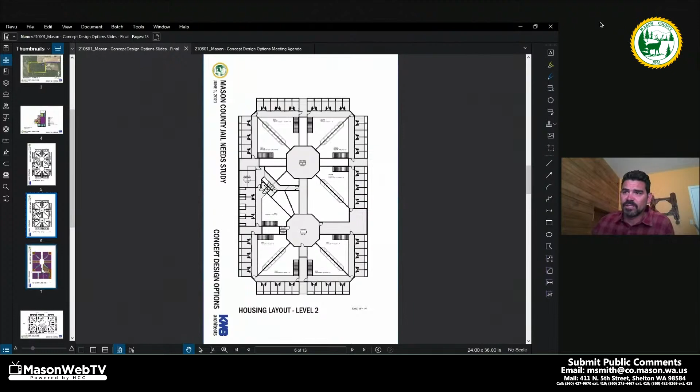And then this is another one we started analyzing: what if we only have one control booth, one central control, again with a radial plan. We'd locate a few additional day rooms around that central hub, and essentially split where those day rooms and units are connected.

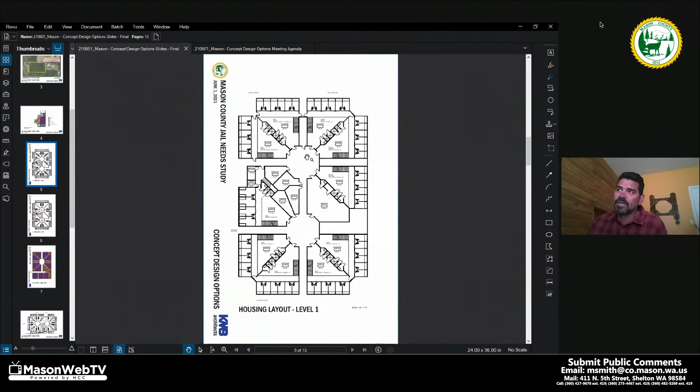So essentially we'd have access looping through more in a 90-degree pattern with this option, versus coming back to the other option where you'd have potential for access either straight through or from the side into this kind of central circulation area underneath central control.

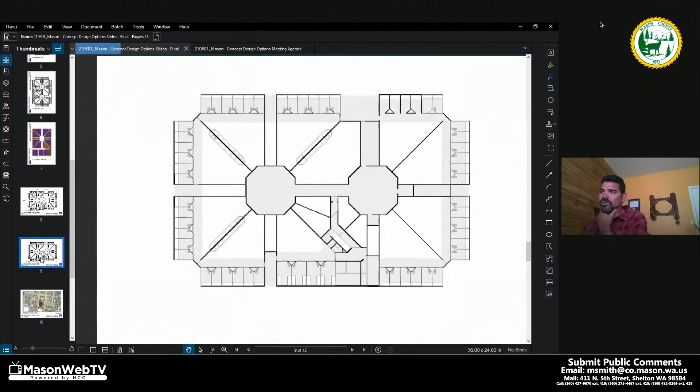And then these were just some other alternatives with regard to how those could possibly get laid out.

So first things first, Kevin. Was there an assumption or a preference with regard to having one singular central control room, or a preference to ultimately have multiple to be able to view directly into each one of the units?

For efficiency's sake, obviously if you have 2 control rooms, that's another FTE, well, another 4.6 FTEs to man it.

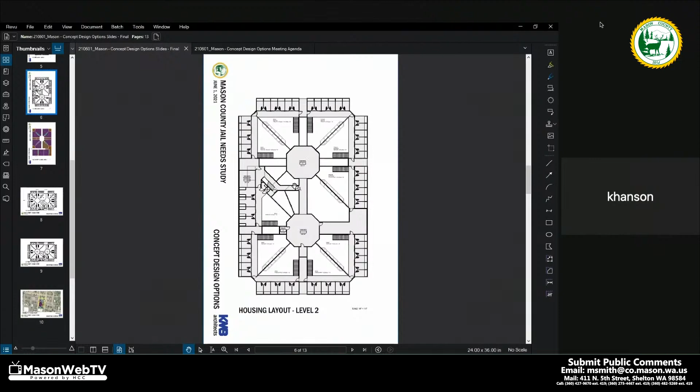And then the other thing was the difference between these two was access to the rec yards. On your first plan, you'd have to come out of the day room and into a corridor and then into the rec yard, which involves staff transport to get them in and out. On the second plan, it looks like we could have direct access to most of those yards from the day rooms, which would not involve staff having to escort inmates in and out. So I'm looking at staff resources, and the second one seems to make a lot more sense to me.

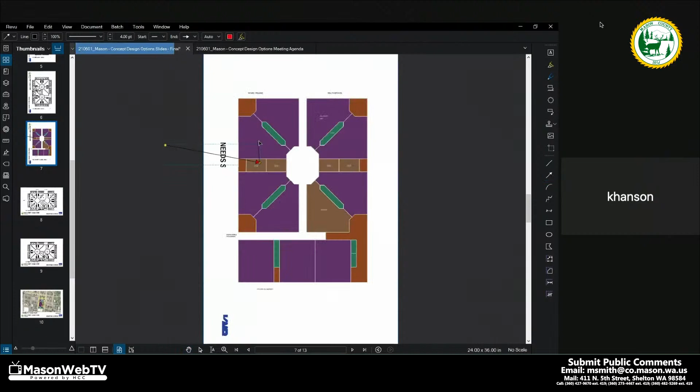Essentially, what we'd be able to do is kind of pick and choose. But essentially, especially if we end up saying your higher custodies are here and here, and depending on where we locate, then all your lesser custodies here and here would be going to your larger day room. So there will be transport, but your higher custodies would most likely have direct access to those smaller rec rooms and outdoor rec areas. So for efficiency's sake and staffing's sake, I think the second plan appears to be more efficient.

Yes, just strictly from an operations standpoint.

And again, we'll have to look at how do we get, where, what are we accessing, what are the benefits in this current plan. Ultimately, we'd have probably intake and health services on this end, coming in here, as we said, health services near your intake, so you have some proximity there.

And then this corridor would come out and kick out to visitation and programs, which would ultimately be right out here. So essentially we're creating that circulation, something like this. Yeah, it looks like it'll work. Okay, so that's good, and that's very beneficial to have that direction.

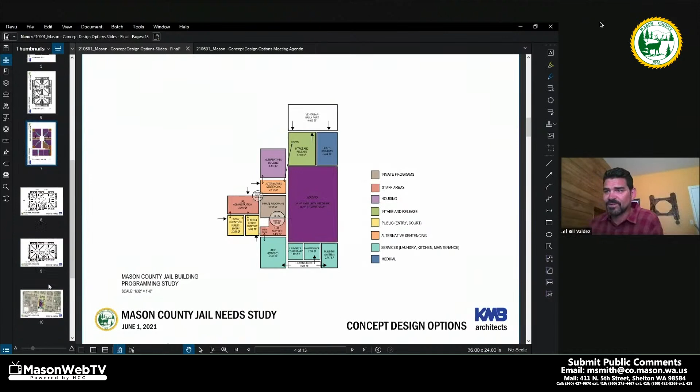Which has a lot of benefits from an operations standpoint, but obviously you have an existing jail, so there become some issues associated with how do we end up making that work.

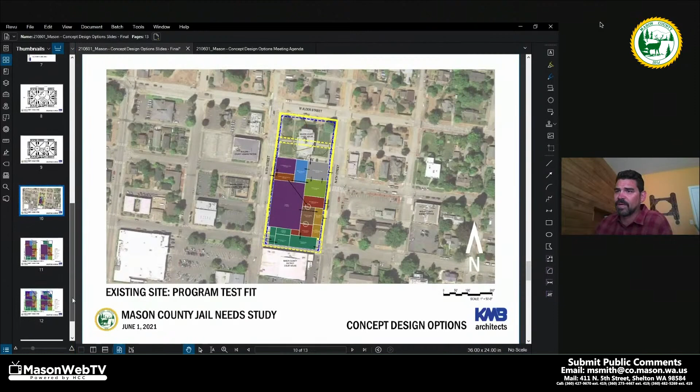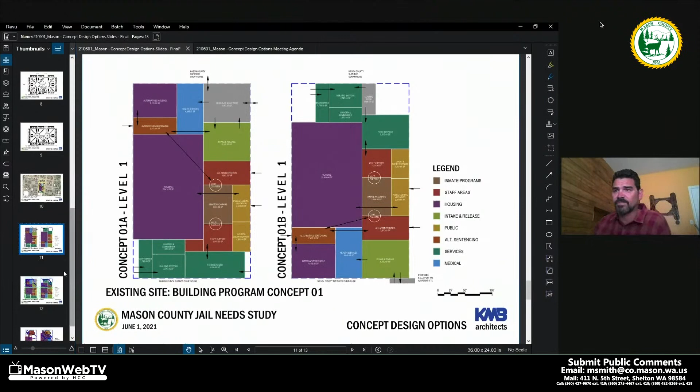This was kind of the blow-up of those two different options, and there's some discussion we talked about with regard to phasing. So actually what we end up doing is we dropped in — this is the face of the property line as far as we can build, right here. This is the existing jail, this dark blue line that we have.

So essentially in both of these options, if we ended up saying okay, we're going to leave the existing building in phase one, phase one construction would be this green dashed outlined area. So this would be the area the contractor could build in under phase one, and everything in that area would be built out by the contractor at that time. Then the contractor would turn the building over, and the facility would then be controlled by the county.

You'd be able to transition all of your program space as well as all the in-custodies out of the jail and into the new jail. And then the existing jail would be demolished and the balance of the jail would be built out, which would be this lighter blue box, the phase 2 construction zone.

So we took those housing array options we had a discussion about, which essentially fits into this area, as well as the alternative housing here. This is your main housing array, and your alternative housing, which is your dormitories, would be here in this option.

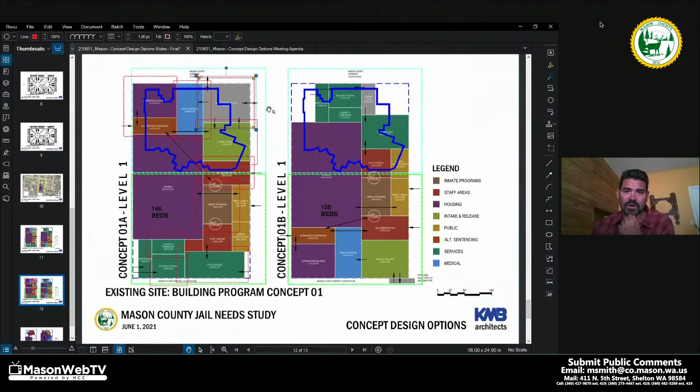There's also capacity. The system-wide has had limitations on capacity within the facility and the system as a whole, that has had long-term effects, both on courts as well as on law enforcement, and on how the jail operates. So that was heard loud and clear during our demographic and programming phase of this project, where we were looking at the demographics and all the fine detail of what people were being sentenced with, how long were they there, when were they leaving, what were the risk assessments being developed. Essentially, those were the key drivers, and the lens we were looking through was to expand and provide additional capacity within the system to alleviate capacity throughout for the other agencies, whether courts or law enforcement, but always looking through the lens of safety and security.

There's obviously additional drivers, as came out of this conversation with Chief Hansen, of providing programs and alternatives that the county has not been able to fully implement or utilize within the existing facility, and wanting to be able to utilize them as part of a new facility or an expansion to the existing facility. So that's what we had heard and documented through this process.

But others that have been involved, like the chief, could probably give their own perspective.

Hey, Bill, I had just a quick question. When we toured the jail, I think it was in Skagit, there were 2 levels of rooms. Is that what is included in here as well?

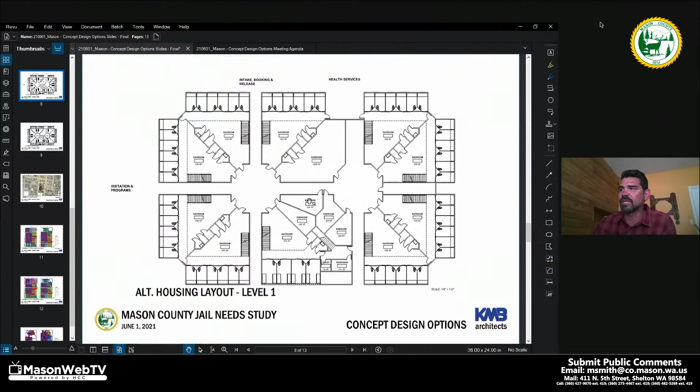Yes. So those would be, it was still a single level jail, but did have housing on a mezzanine level. So essentially what we would be looking at with these plans would be, this would be a first level. Everything's at grade. And then there's a series of stairs within each one of the day rooms that provides access to a mezzanine level of additional cells. So this would be the mezzanine level, which the control room would also be at. That's how we're able to get our quantity of beds and bed count within it.

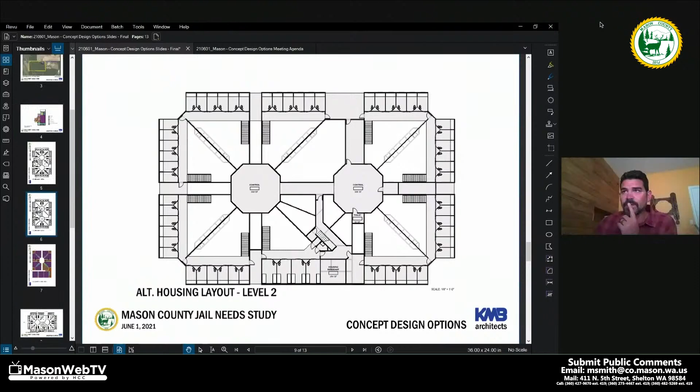Exactly. Okay, so if you go back to the one with the central, just one control center. Oh, yeah. Would that be basically the same? That would be the exact same. So this would be just a diagram. We didn't have a chance once we started talking about it to draw it up, but that would be the next step. Essentially, this would all be at grade, and you'd have cells along here and here and here, and within each one of these day rooms there would be another stair that would access a mezzanine level of additional cells and beds off of each one of these. So even in this plan, there would be a second level, a mezzanine level, which would be control as well as essentially half of the cell and bed capacity.

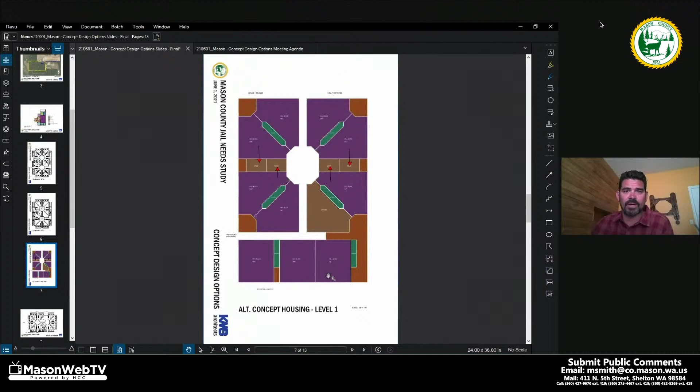Okay. Can you remind me again, how will this house the same, either between 146 to 150? Yes. So really it's where this would slide up and down within the phase 1 or phase 2 boundary, that in either one of those, you would actually be able to get, or any plan that we'd end up doing for housing and housing configuration, we'd probably be able to get about 140 to 150 beds. And that number is going to go up or down depending on really what that mix of beds is going to be, whether that's part of phase 1 or phase 2, because we have some units that are dorms, some that are quad cells, some that are single and double cells. So if you end up having all double cells and single cells in phase 1, that number is going to drop and be a little bit lower. If you have, like with this option where we have a lot of dormitories, we pretty much have quad cells and double cells, we're able to be on the higher end of 150. But there's a potential we could be more like 138, 140, depending on really what that bed mix ends up being with the final plan. But we're going to be in that area.

Okay. I worry about putting it here. I love the idea of having a justice complex, so to speak. But I do worry about tearing down the other jail and building the new jail.

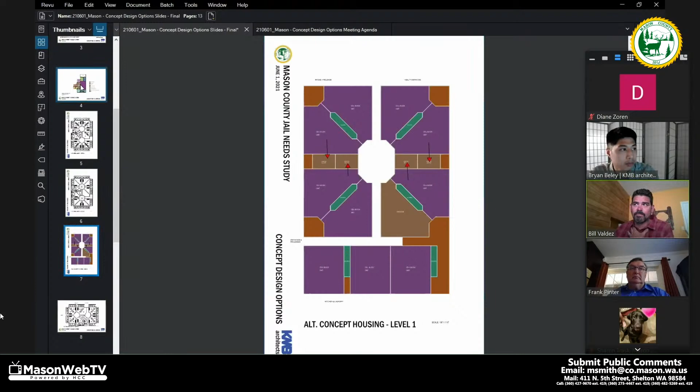Did we narrow down the list of options that are going to be presented, or which of these concepts are going to get narrowed down? Well, at least from what I've heard, this is from a housing plan standpoint, kind of the preferred option. As far as on-site development on a new site, I haven't heard anything to the contrary that this type of idea with regard to overall planning is acceptable.

Chief Hansen, is that correct? Did you have any things that didn't really work here? No, we like that. Okay, so we'll really refine those, and like Bryan indicated, John Bales...

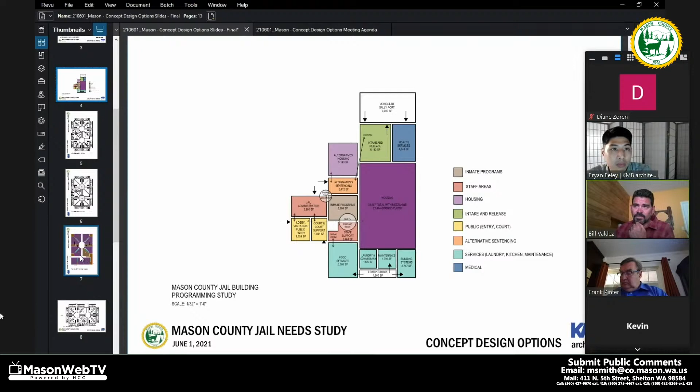What we'll be able to do is really start looking based off the current construction market and looking out from a timing standpoint as well, to develop what the high level cost models are going to be. That would be based on this as well as the existing site for meeting these needs, and at least we'll be able to do a bit of a comparison.

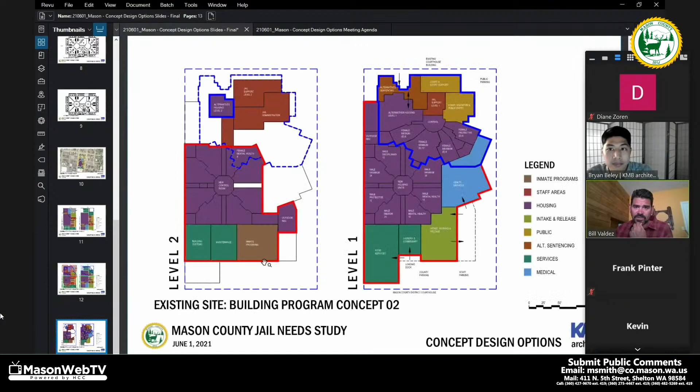I guess the question becomes, and this might come out of follow-on conversations regarding financing and funding, doing something where you're able to really add on to your existing facility. That would be the only way I think we'd be able to come up with a solution that's able to partially meet needs, but be within some budgetary limit that we talked about previously.

Maybe that's something we should table for now until we've run through this and really understand if there's a budgetary target we need to hit. Then we can go through an evaluation and a conversation about what the priorities are to focus on with regard to need, and then develop a solution to meet whatever that revised need is, and hit within that target budget. But I don't think we have enough information at this point to really do much with this, because it's not going to align with either the target budget or the target need.

So at least for me, I would say we table this type of conversation until more information is available. And I would agree with that. Okay.